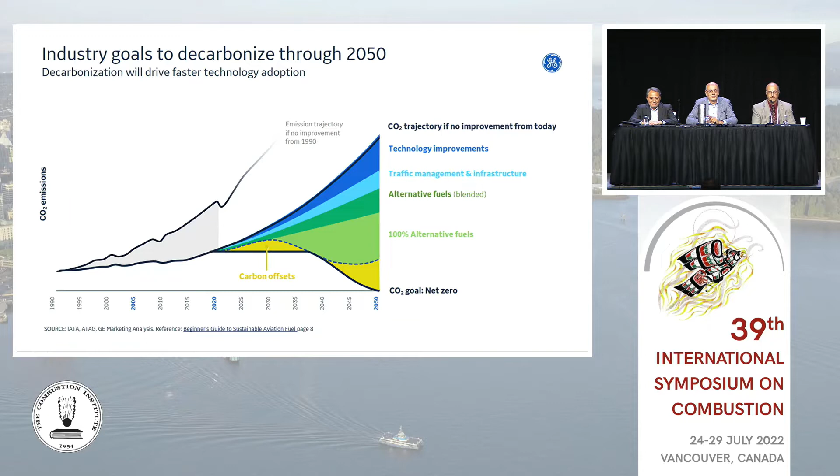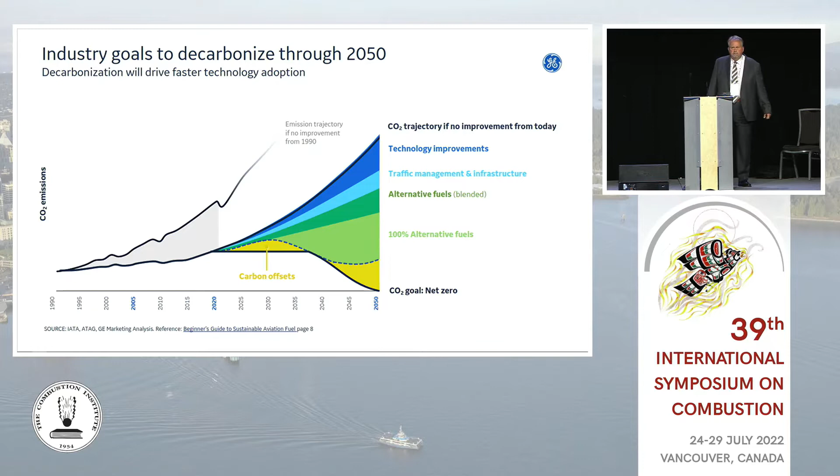Okay, so I'm going to be talking a little bit about decarbonization as it applies to the airline industry, air transport. And the first chart I wanted to show is really the decarbonization goal for the industry.

And there are a few different curves that I've broken into here. The one with the highest CO2 emissions is shown pictorially, and this illustrates how we think we can get to zero carbon by 2050, which is the goal set by the International Air Transport Association.

So there's a number of different components here. There's, well, CO2 trajectory, if no improvement from today, is the top curve you see.

Then the other way we're going to reduce carbon emissions is through technology improvements to improve efficiency of the engines and the aircraft. The traffic management and infrastructure we feel can be improved to also reduce emissions. That's things like runway operations and how we manage the infrastructure at airports.

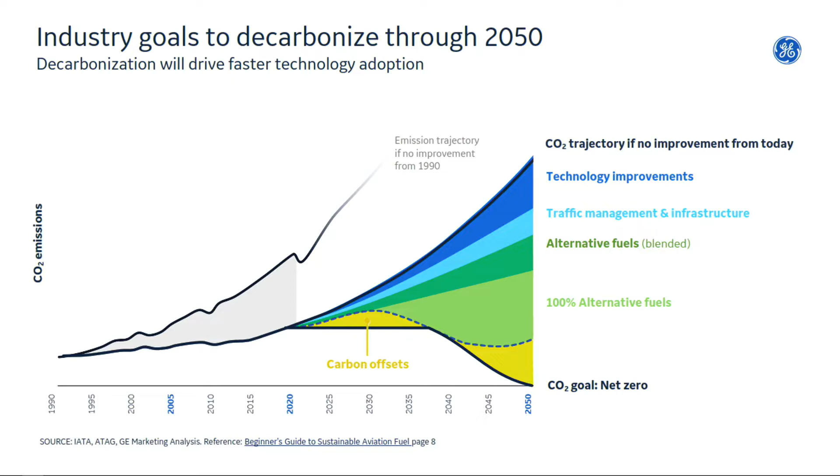So I mentioned technology and improvements in technology. This slide describes a few of those areas that GE is certainly active in terms of developing technology.

Hybrid electric, that's an area we've been involved with for some time, and this is where electric power would be used at least during part of a flight. Perhaps takeoff would be accomplished by using jet engines to augment the electric system, and then perhaps when you're in the cruise mode, you might be able to turn off the jet engine and just run the electric motors with batteries. And that's just an example of how hybrid electric may work in reality.

Now, the center picture, the CFM RISE, that's a joint effort between us and CFM, or Safran Aircraft Engines, to improve efficiency of jet engines. And we do that by going to a more compact, efficient core, and also this open fan architecture. So we feel that by going in this direction, by using advanced thermal cycles, the open fan and compact core, we can get maybe up to 20% better fuel efficiency than what's state of the art right now.

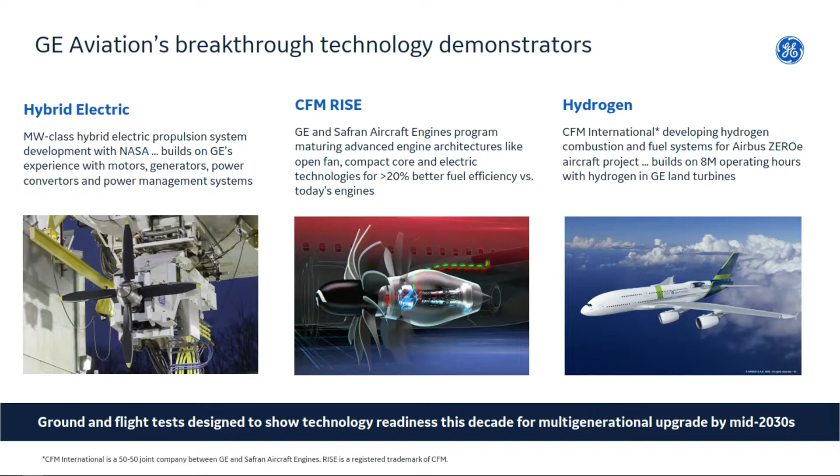Now, I just wanted to spend a few minutes, as I mentioned in the first chart, a large part of decarbonization for aviation is going to be accomplished through sustainable fuels, alternative fuels. So SAF, sustainable aviation fuel, it's kind of a broad term used to describe a number of synthetic fuels that are being studied and some implemented in the industry now. So we have two types of SAF that we talk about.

Can you please go back to the previous chart? Thank you. Now the non-drop-in SAF, we expect at some point there will be SAF fuels that will probably require some design changes in the combustion system. And in the list down below, I've put little flames next to the properties that we anticipate may vary depending on the SAF blend, the feedstock, the process used to make it. These particular properties are definitely going to affect the combustion process, and it's likely that we will have to do a fair amount of technology development and testing to accommodate the range of property variation that we're anticipating.

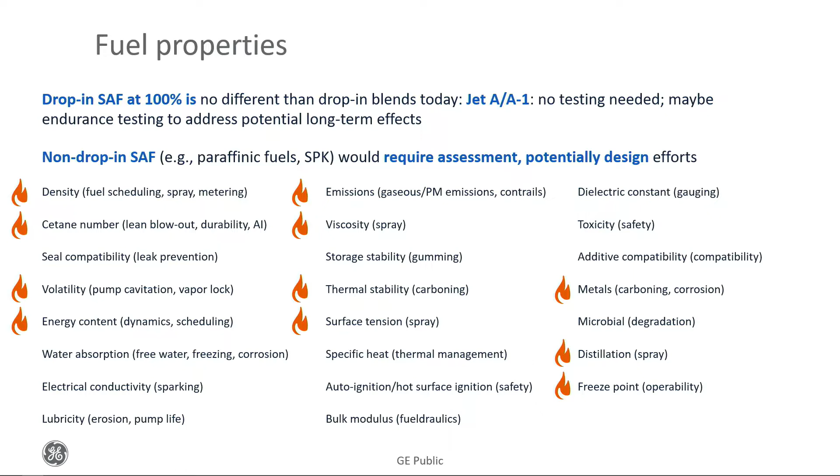So, to give you an idea of some of these fundamental processes that definitely affect combustion performance, they're shown here. So there's a number of different properties or different processes that have to occur, like the formation of a liquid spray, injection of that fuel into the combustion chamber, and other processes that will be affected due to changes in the fuel properties.

And so we're mapping from the left column to the right column what we feel these different changes in fuel behavior will affect on the combustion side. And the graphics on the right-hand side give some examples for how we believe SAF may affect existing combustor components.

So you see the sprays at the top of the graphic show a very nicely atomized spray on the left, and on the right-hand side, please go back. You see a streaky spray that could be the result of variations in the fuel viscosity, the density, surface tension, etc. Can we go back to the previous slide, please? Thank you.

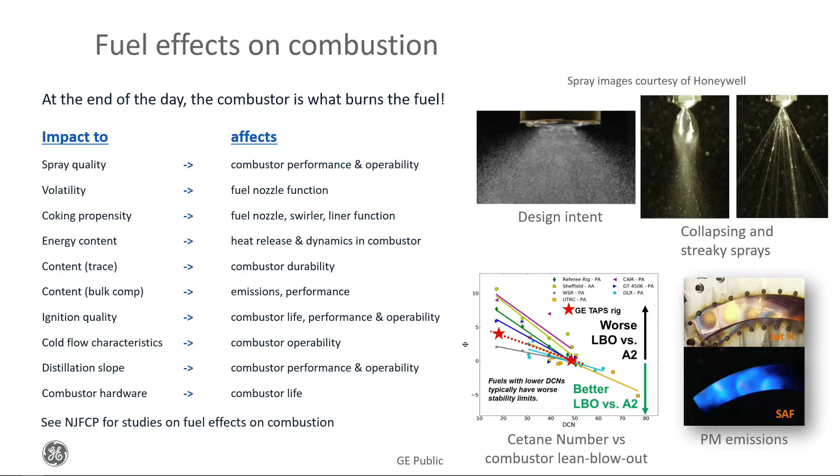A couple thoughts around design implications. I think certainly some level of fuel standards will need to be imposed to keep certain properties within boundaries that we feel need to be established. But there may be other things that can be done to design combustion systems that are fuel tolerant or fuel variation tolerant. So just a few thoughts on what we might be able to do.

Have fuel nozzles that are tolerant to variations in fuel properties and produce a well-atomized spray for a variety of fuels or SAF fuels. Maybe we optimize combustion chambers or combustion systems so that they operate acceptably with sort of a bad fuel, if you want to think of it that way. So I think versatility of the combustor to fuel variation may be something we really need to bring into the picture. There are other things like corrosion, durability of the systems over long periods of time. Many of these things are unknown simply because SAF has not been in use for that long.

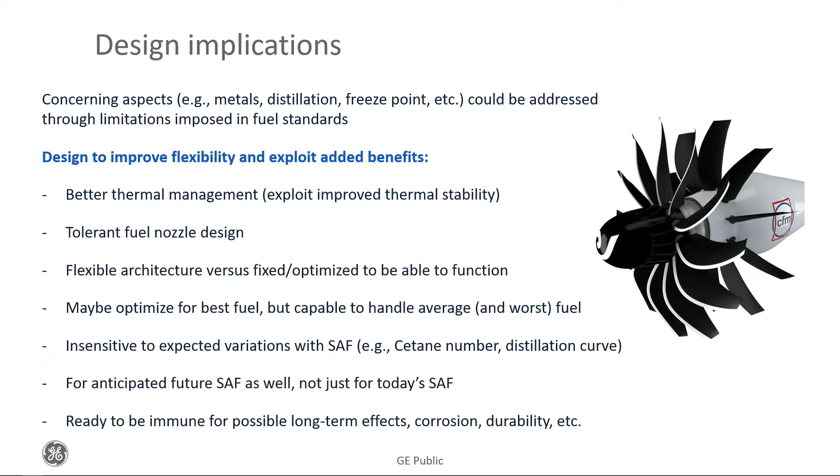Certainly emissions regulations are an important thing to keep in mind and to make sure we're ready to address. ICAO is the organization that sets emission standards for commercial aviation. They regulate all these species: CO2, CO, unburned hydrocarbons, NOx, non-volatile particulate matter, noise, and smoke. So all these emissions are regulated, and we do expect them to be impacted when we change the fuel and move toward SAF fuels.

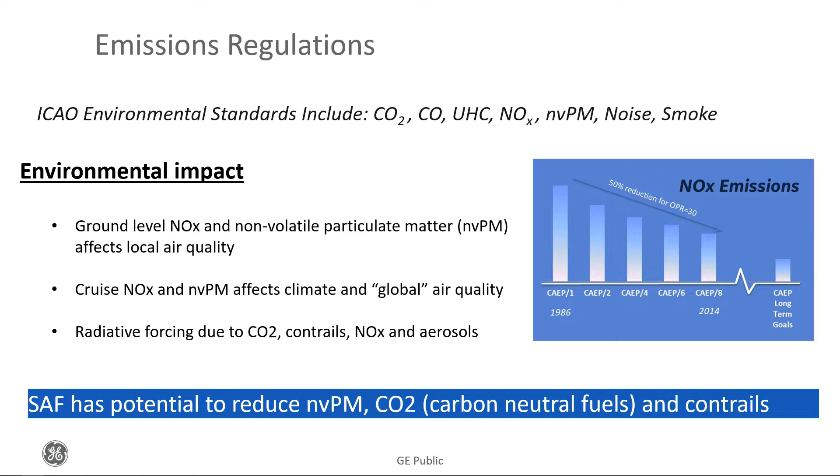Just a few points: ground NOx and particulate matter low in the atmosphere affects local air quality, and that's why it's regulated. Now, cruise NOx and non-volatile particulate matter can affect the climate because when they're emitted in the upper atmosphere, they force a greenhouse gas effect.

Could you please go back to the last slide? So I'll just keep talking. We know SAF fuels can have a tendency to emit less particulate matter. That has an implication in aerosol formation and contrail formation. So we actually expect that SAF may reduce certain emissions and contrail formation. I guess with that, I'll stop.

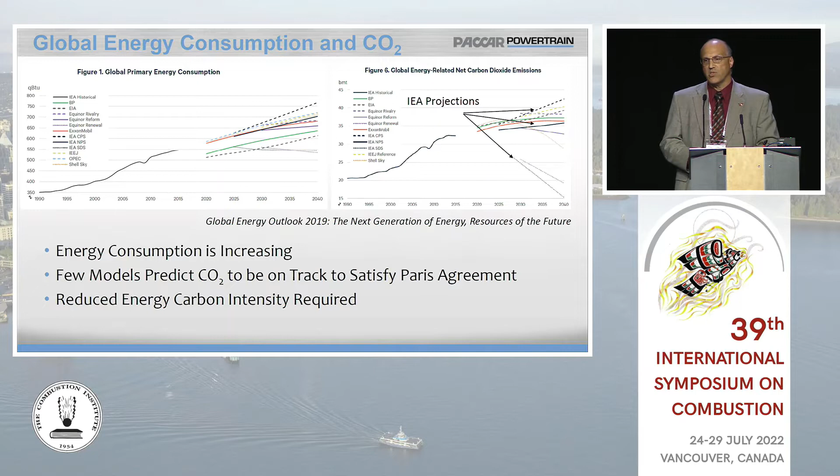This is not a very new slide for anyone, but I include it anyway. CO2 is obviously a pathway where if we don't make some changes sooner versus later, the numbers get very distressing in a very short period of time. There are very few models that predict CO2 will be on track to satisfy the Paris Agreement.

So there are three pathways to net zero greenhouse gas emissions: use of electricity, which is a double-edged sword in that the electricity needs to be generated from something, preferably something that isn't putting carbon into the air; green fuels, where the devil is in the details with the processing; and hydrogen gas.

So we're minimizing CO2 from fuel production, CO2 from the vehicle life cycle, and CO2 from the tailpipe. We have to account for even manufacturing and disposing of the vehicles in our CO2 footprint, and their use while the vehicles are within customer use. And we also have to maintain acceptable productivity, operating cost, and infrastructure cost.

Someone once asked me who the first adopters of our EV trucks are, wondering if we had any Tesla-type first adopters in our marketplace. I said no, the people that buy our trucks make money with those trucks. There's no such thing as somebody buying one of our trucks because of its coolness factor. That customer does not exist. If you know any of them, please send them my way because we have trucks for them.

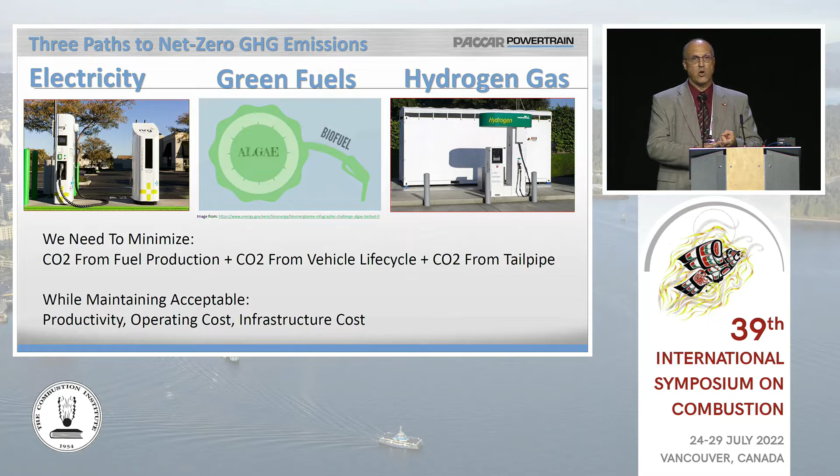But to this point, they're looking strictly at the bottom line. What do we pay for this truck? Does it operate every day it's supposed to? Does it cost me what I expect? And does it do the job I pay for? If any of those questions are no, they don't tend to buy our trucks. It's pretty simple.

So one thing I like to do with an audience that is not familiar with transportation - and I've been working in transportation professionally since 1990, as Roger mentioned. I started in the aircraft business as a propulsion engineer at an airline. So if it burns fuel and moves, I've probably put a wrench on it.

We're accustomed to thinking about fuel economy as consumers in miles per gallon or liters per 100 kilometers, depending upon where you live. That's a horrible metric when it comes to freight transport. So one of the ways we like to look at it is freight efficiency - how many ton-miles per gallon can we move things. Most Class 8 trucks top out at 80,000 pounds, so it's on the order of 40 tons.

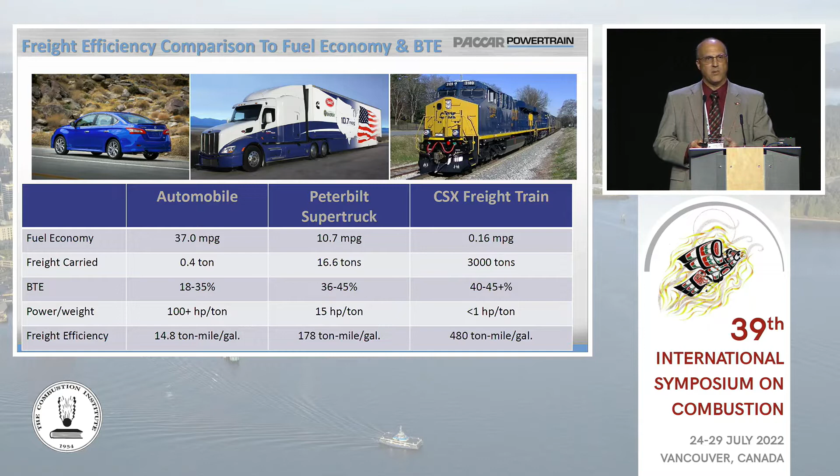If you take a look at the freight efficiency of a light-duty vehicle, it's pretty poor by comparison. The truck is an order of magnitude better, and rail is about a factor of 3 better than truck. So these vehicles genuinely are freight-moving modes of transport. The energy density of the storage and the power density of the unit that provides the power become of critical importance.

Electrification isn't always simple. Depending upon where you live in the world, or even in the United States, the grid carbon intensity matters a lot. And if you're out on the West Coast like we are, most of our power is hydro, so it's relatively easy to get relatively clean power.

But I'm from the Midwest. If you take a look at what the Great Lakes region and the middle portion of Missouri and Arkansas look like, you would actually be less carbon intensive driving a diesel-powered vehicle than an electric one, just simply because of how grid carbon dependent it is. Now, that's probably not always going to be true, but this data is recent - I just pulled it up, and it goes back maybe about 6 months. So this graph is still fairly recent. It matters a lot where you live.

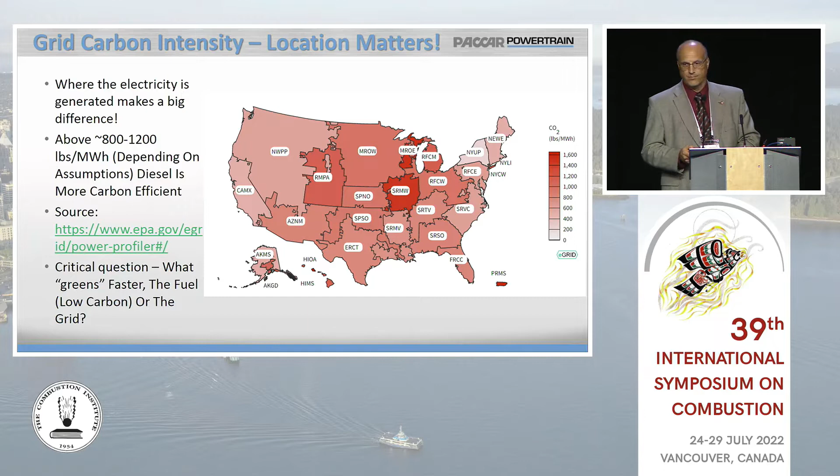Considerations I had to account for in working with electrochemical circuits: how much battery capacity can we put on the truck? How much does it weigh? How much does it cost? When you run the numbers with today's technology, anything where the vehicle travels more than 300 miles becomes very challenging to make into a BEV.

Our assumptions are roughly 16 pounds per kilowatt hour and roughly $200 per kilowatt hour as far as cost goes. So Class 8 long haul really isn't part of the equation. Those are likely to be liquid fuel powered for the foreseeable future because we simply cannot, with weight and size restrictions and battery technology as it exists, fit enough energy on board the truck to get it the range it needs to carry the payload it carries.

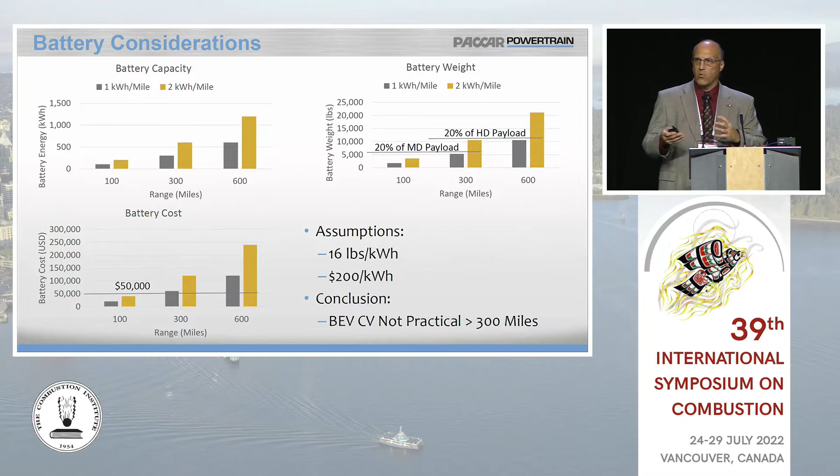So this is partly where we are going to have a mix of technologies in this area. As a result, we've taken a look at the different types of trucks we make and what some of these technologies may look like. When you look at the green striped areas, the weight is essentially the vertical axis, and how much city driving is on the horizontal axis.

Our medium duty trucks are likely to be BEV, coming up in relatively short time frames, probably 2027 to 2030. That blue line in the middle is sort of the great unknown region. Some of it may be hybrid electric, but hybrid electric can also mean fuel cell and not just engine. Each one we look at in the same way.

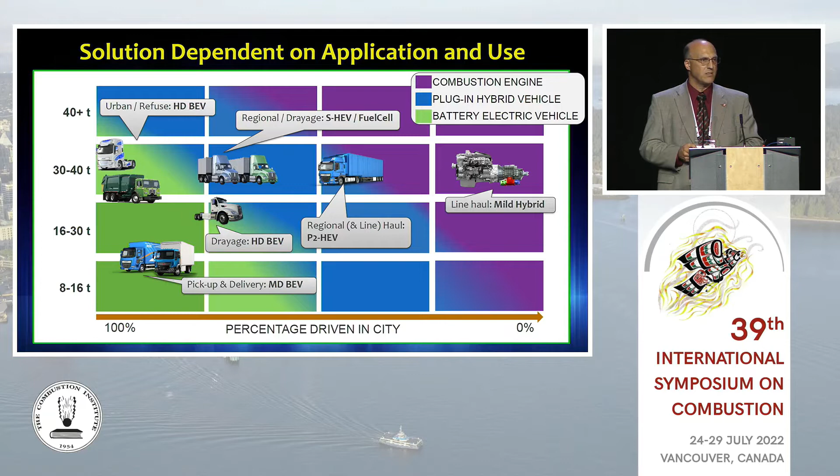So when you take a look at the percentage driven in the city and the weight, you can see that for the longer haul trucks that have higher weight, those are likely to still be some form of liquid fuel. The challenge then is going to be meeting emission standards and meeting greenhouse gas, because those regulations don't change.

Then we get the opportunity to deal with IC engine bans. And unfortunately, nobody asked me or cared whether or not I thought it was fair, whether or not I thought it made sense, whether or not these solutions or target regulations are reasonable. Our company is tasked with being able to meet the regulations as they're written, or we don't sell trucks.

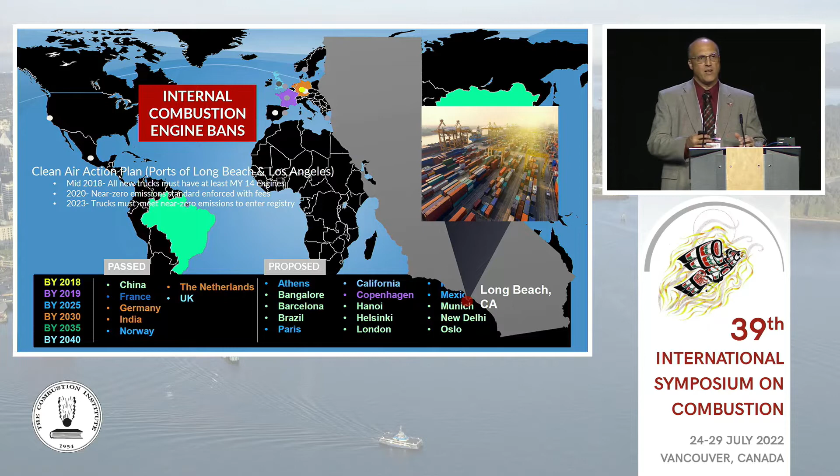So the plan here is that regardless of whether or not we like it, there are certain areas of the world where we are going to have to make a reliable, relatively inexpensive vehicle that fits these criteria. That's how we make money—we sell trucks. So we don't get the largesse to basically complain about it. We have to figure out how we're going to make the technology work in a way that's suitable for our customers.

To summarize, there are regulatory and market pressures that are changing the freight transport business drastically. I think the other panelists will probably agree that these are not consumer-driven or customer-driven market changes—these are regulatory-driven market changes. We need advanced technology to hit these targets, and the well-to-wheels analysis is critical to ensure that we don't follow the wrong path. Greenhouse gas and ZEV at the tailpipe regulations are likely going to force our solution choices.

The technology needs to fit the application and meet our market constraints: total cost of ownership, TCO, and uptime. Every day the vehicle's not available is 5% fuel economy to our customers—the most important factors to our customers. The heavy-duty truck industry is investigating all of these technologies, and even some that I can't talk about. Solutions that seem like a slam dunk aren't always so, in every direction.

And with that, I'll close my presentation. Thank you for your attention.

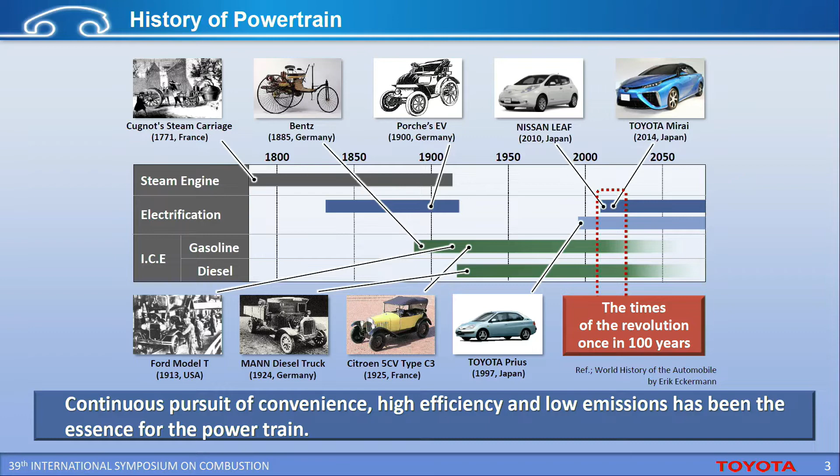Renewable energy brings benefit to our life. On the other hand, renewable energies have some issues. I'd like to talk about issues to be solved.

One issue is most renewable energies are unevenly distributed. In the case of wind power, the areas in high latitude have a large potential. For example, North and West Europe and the southern part of South America are suitable areas for wind-generated electricity.

Solar power is also unevenly distributed. Therefore, we have to consider the options which are suitable for each area.

Another issue is fluctuations. As for renewable energy, we have to consider 4 factors: production, transportation, storage, and utilization. Electricity generated from solar energy and wind energy always fluctuates under the influence of clouds and wind. And increasing electricity generated from solar energy and wind energy will lead to increased surplus in electricity sometimes. To correspond to fluctuation and surplus, storage and transportation play indispensable roles in the energy cycle.

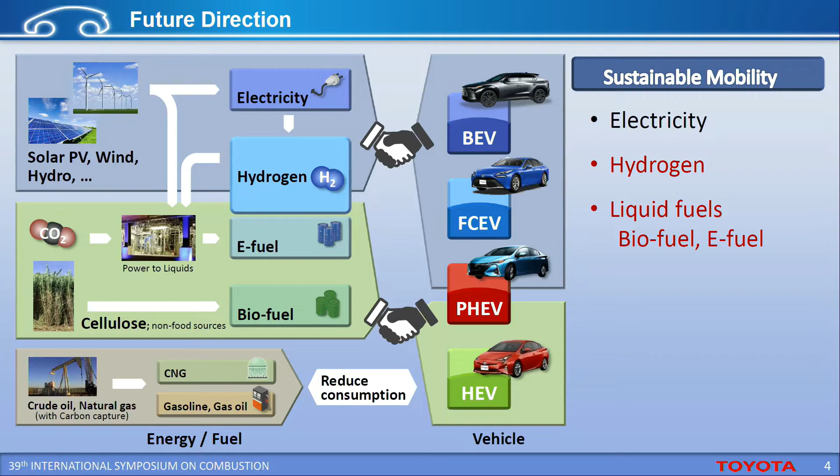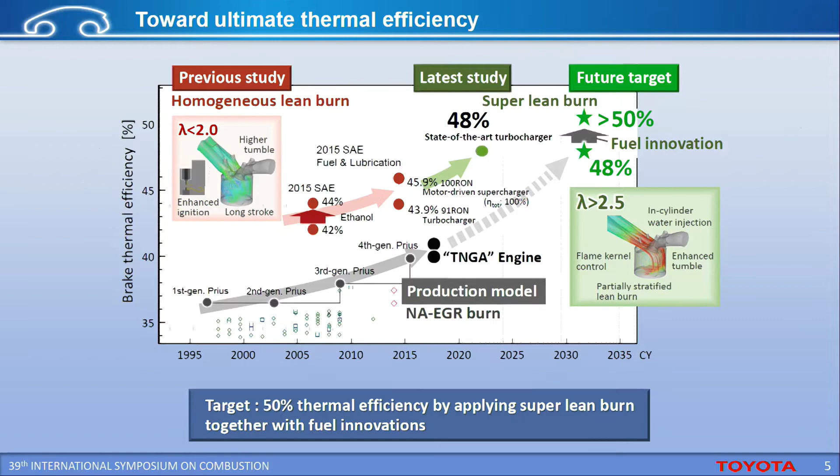Please go to the next slide. This slide shows the result of our latest studies. The outline is shown in the right top. The key technologies are how to ignite the air-fuel mixture and how to make a fast flame propagation under the super lean condition.

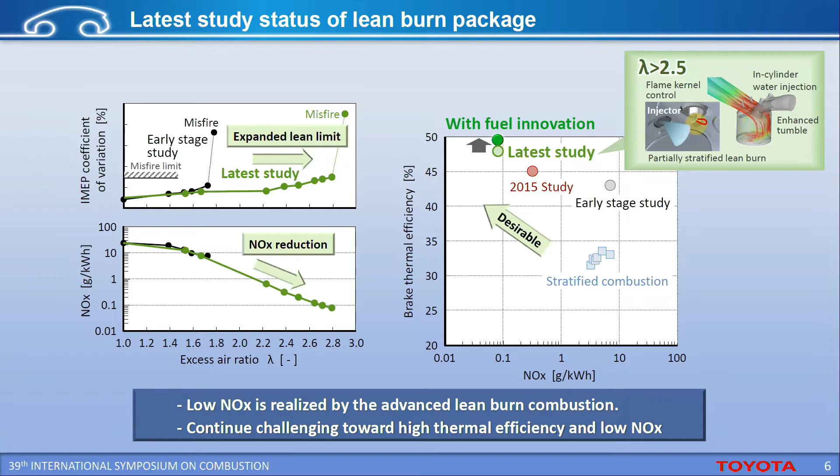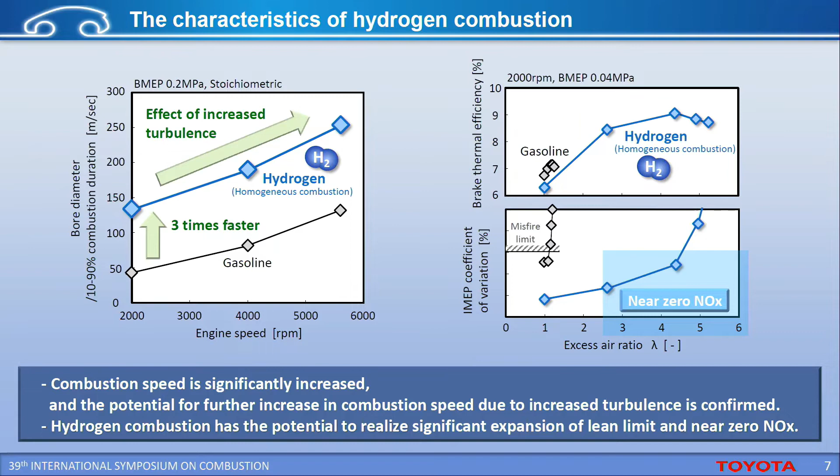Today, I talked about the options for carbon neutrality. It goes without saying battery EV is a major option. And we think the combination between engine technologies and fuel technologies is also an important option to contribute to reducing GHG in the future. Next slide, please.

Well, apart from generating the electricity, of course. And SMRs, small modular reactors - small medium nuclear reactors - that's something specifically the UK is looking at. At least you will not emit any CO2 emissions there.

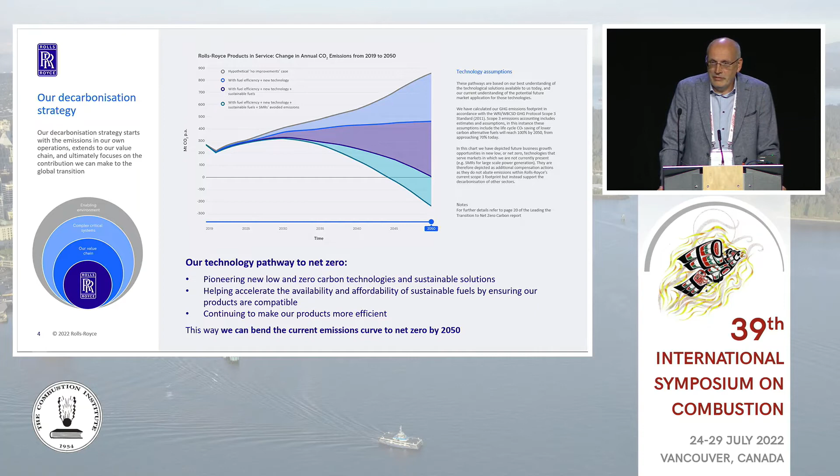So also here, a very similar plot in the middle, as seen before, shows how we can achieve our decarbonization strategy. We have to look at different kinds of technologies to achieve that and to accelerate the way towards reducing CO2 emissions. It depends very strongly on the availability and price affordability of sustainable aviation fuels.

This is focused specifically on aviation, and we're looking at different parallel paths to reduce CO2 emissions. As previous speakers have touched on, electric is something we're looking at as well, but it depends strongly on the application, similar to trucks and cars. Electric is something we already pioneered - we developed some very small airplanes which run on electric power, but these were small, and it's only useful in the range from urban mobility for very small distances up to commuters, where we think electric can be a solution for the future.

The next one is if you look at sustainable aviation fuels, like more of a hybrid system - electric combined with combustion fuels. That's something you can imagine scaling up to regional jets.

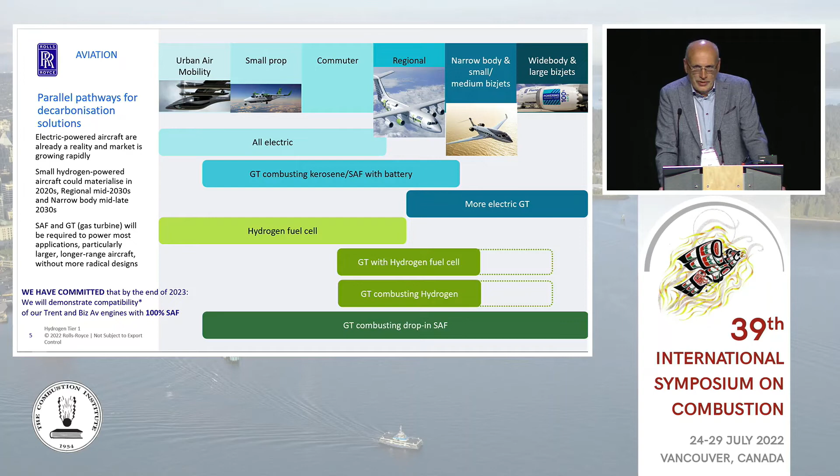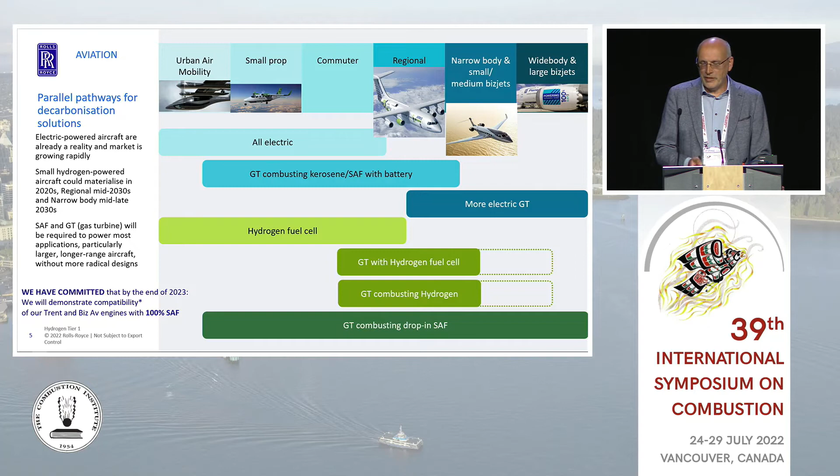And then the third way to reduce CO2 emissions is to go to hydrogen. That's an option considered across all sections. It's quite challenging to carry the fuel, and I'll come back to that later in one of the slides on hydrogen. Fuel cells are also still in the picture - it's an option, a technology we've worked on for quite a long time, and it's still in our vision. But it still needs a lot of development to get to the very high power densities we need for aviation.

SAF can be a very broad range of fuels, and currently what has been tested is HEFA-like fuels. That's something available, and it's almost within the specification of kerosene. Similar to what Guy said before, from a combustion point of view that's not so difficult, but there are many more aspects important for an airplane, like fuel pump seals and all these aspects.

But what we've done for a range of engines, for the Trent 1000, we did ground tests with the lean burn system, and the most advanced testing with a Trent engine on an Airbus 350, where we flew with 100% SAF fuels to demonstrate it's possible, and we didn't notice any problems. Also for business jets, at the key component center of Rolls-Royce in Germany where I work, we did ground tests of the Pearl engines, and these also gave satisfactory results.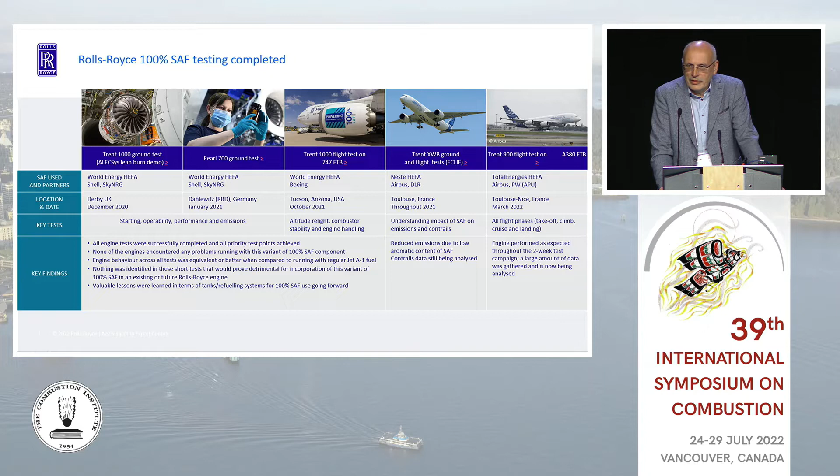So the next one is a slide on hydrogen and the different aspects here. I start with something which is not really clear and has to be investigated, because it's not clear what the impact is if you switch from liquid fuel to hydrogen. You have much more water emissions, and this will lead to contrails, which also have a considerable effect on the environment. A lot of research has been done, but whether hydrogen is better or not in the end is not so obvious or clear.

What I touched on before is that energy density is key for aviation. The highest energy density you can get is with liquid hydrogen, but you have to go to minus 253 degrees Celsius, and then you have an energy density which is still far away from, still not reaching, that of kerosene.

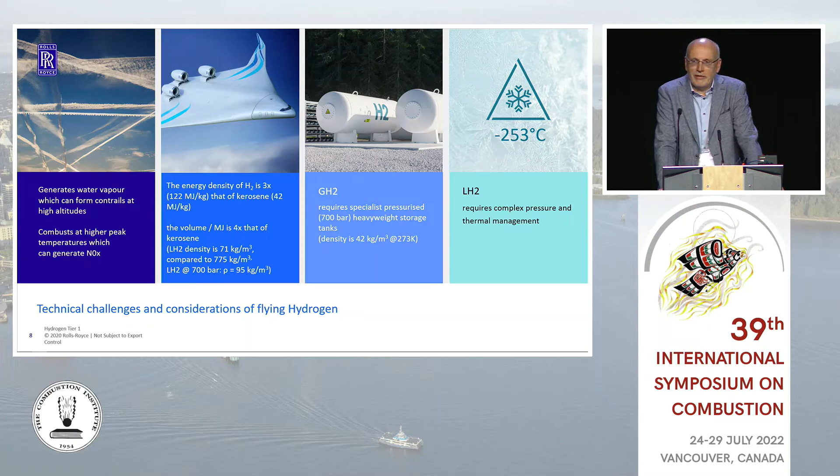So talking about this, one advantage is the energy density in megajoules per kilogram, which is 3 times higher for hydrogen, but the density itself spoils it. Then you can either pressurize it or use liquid hydrogen, and looking at energy in megajoules per cubic meter, liquid hydrogen has an advantage, but it's also technically more complicated. So we also keep in mind that there are applications where pressurized hydrogen could be an option.

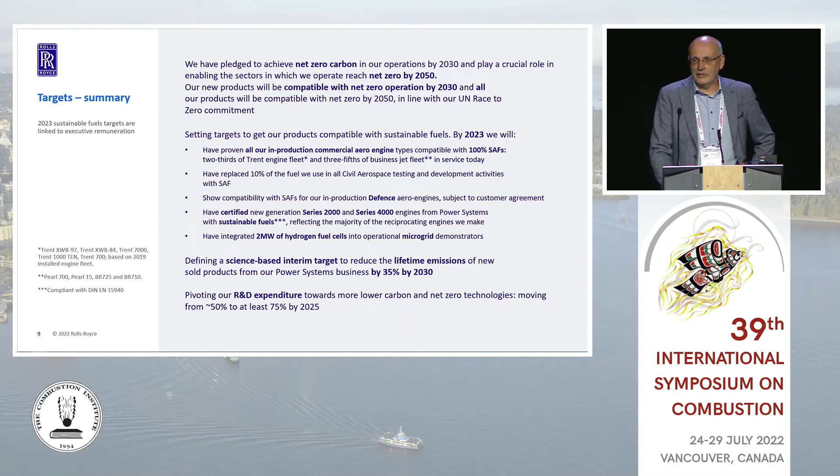I think this is basically what I want to say. These are the high-level targets for how we want to achieve net zero carbon emissions. We have set targets for 2023 that all our production engines are 100% SAF compatible, and we also want to achieve lifetime emissions reduced by 35% by 2030. Currently it's a very exciting time because we're doing a lot of development on improving efficiency to reduce CO2 emissions, and also developing new technologies like hydrogen combustion at the moment. And also not to mention, hybrid electric systems is another area we're looking at. Thank you very much.

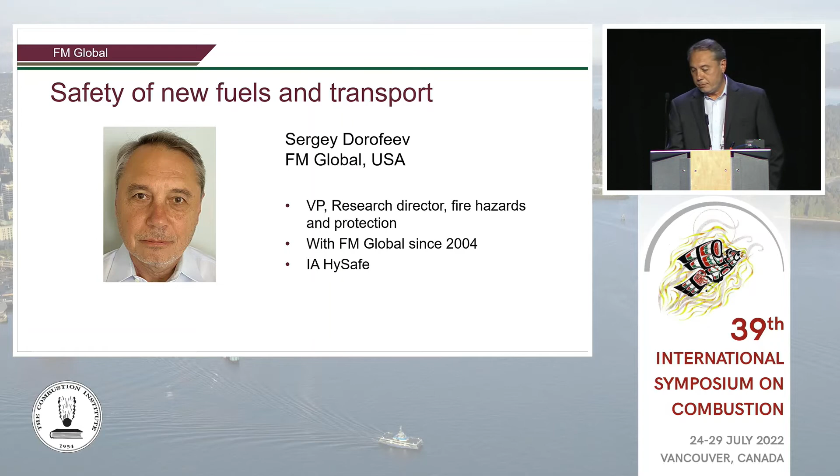If we understand the hazards, we need to evaluate the risk involved in industrial application and in public use. Then, understanding the risk and the hazard, we need to develop loss prevention solutions and safety solutions, such as mitigation measures, safety distances, and other solutions which allow safe handling of new materials. This is exactly what FM Global is doing, working with industrial applications and with our industrial clients.

When we speak about new renewable fuels, first of all, the most important from the point of view of hazards is hydrogen blends, such as natural gas plus hydrogen, syngas, and hydrogen-ammonia mixtures. We need to understand this for variable composition, variable temperature and pressure, and specifically many important understandings are still necessary for how to handle liquefied hydrogen.

And this is not just the vehicles which are involved in using these fuels as energy carriers. There is production of this fuel, there is necessary transportation of this fuel, sometimes in big quantities over large distances. We need to use this in power generation to provide electricity, maybe for electrical vehicles. All of this is important, and this results in a wide range of properties which we need to understand.

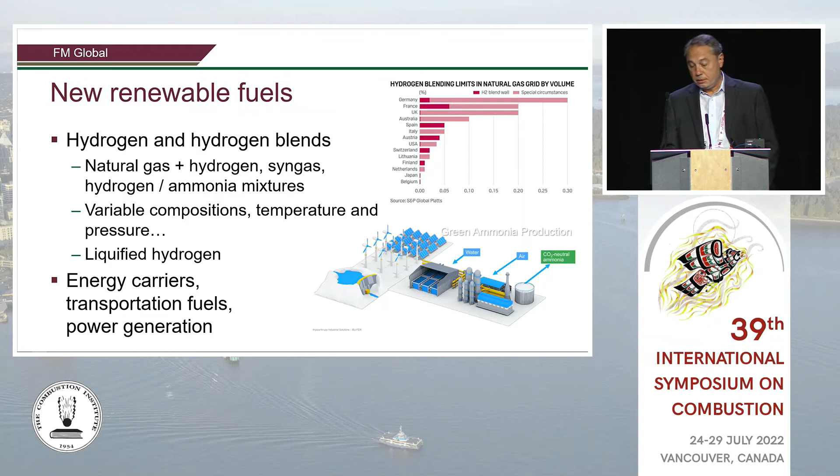These new fuels, specifically hydrogen blends, are different from other fuels. They have different burning velocity, different instability limits, and they produce different flame heat fluxes to the surroundings. Another important parameter is flame jet blow-off limits, which is different for hydrogen blends than for propane and gasoline, for example. It's also different in detonation properties.

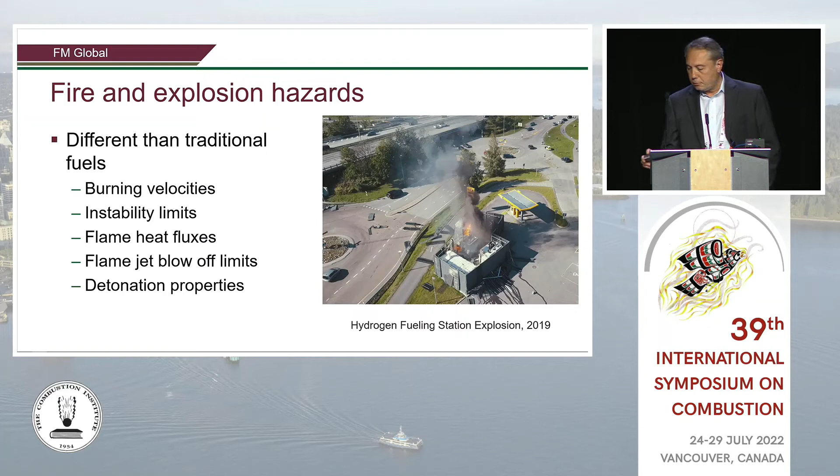When we look into safety considerations or understanding the hazards of these fuels and other normal fuels, we have very good understanding of the practical combustion properties of the fuels in use, and for individual fuels as well. For example, we have pretty good understanding of combustion properties of hydrogen. But we do have a lack of understanding of the fundamental properties of mixed fuel at various temperature and pressure. This is work in progress for the combustion community, and I understand this is a very important part of the work. I was pleased to see this morning how many ammonia combustion papers were presented.

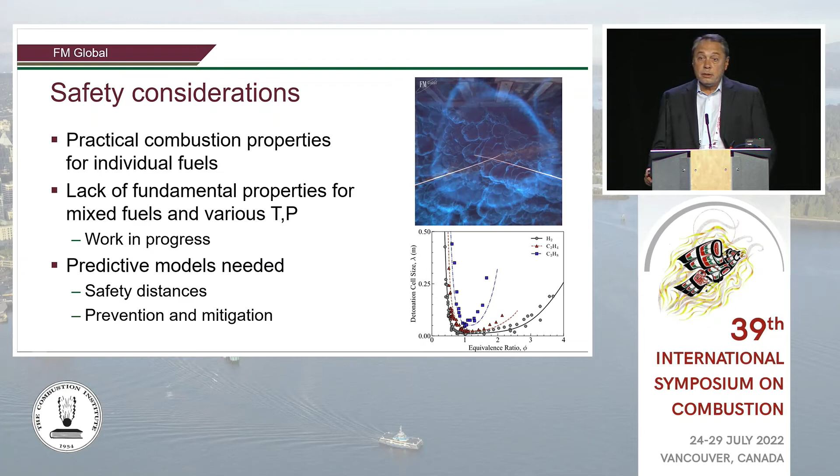We will still have a lot of things to do, and I cannot overemphasize the importance of studying the fundamental properties of new fuels in this community, because all our safety measures and recommendations should be based on science and have a really good foundation. We also need predictive models for safety distances, prevention and mitigation of fires and explosions, which can be used at the engineering level and applied to practice.

Now, a little bit about lithium-ion battery safety. It is part of the energy carrier, the lithium-ion battery, which is used in vehicles, in transport, and in power storage, and so on. Everybody knows that what often happens is thermal runaway, which generates combustible gas release. The gas is a mixture of hydrocarbons, hydrogen, CO, CO2, and other components, depending on the type of lithium-ion battery. Some are more dangerous for thermal runaway, some are less dangerous, but none of them until now is truly safe.

So we still have accidents with any types of batteries, and we need to understand this better. This is a mixture of two things: if we have ignited, unmixed release, we have a fire hazard. If we have unignited release and mixing of this fuel, we have explosion hazards, and we need to understand this better. I believe there is an important piece of work for this community to move forward. I will stop now, and I will be happy to answer any questions and go into further details if you would like. Thank you.